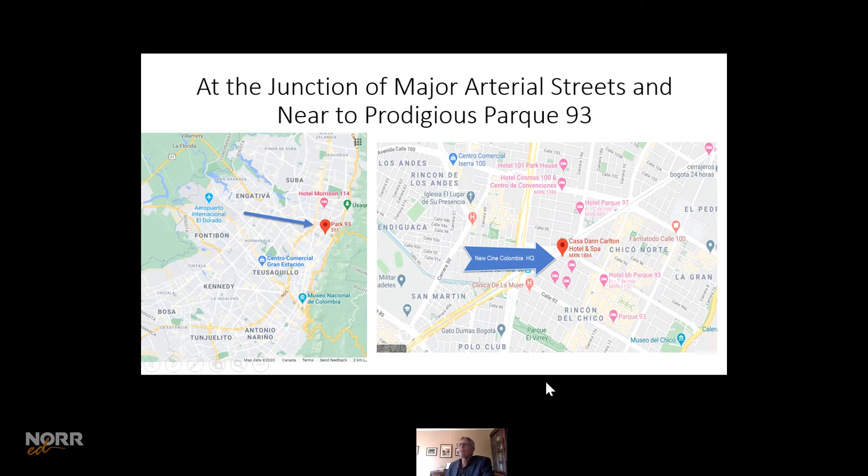The inspiration for some of the architectural rendering and the process here is from a project by OMA in the Netherlands - the building Fondazione Prada in Milan. This was the building we first sought out as the best example of white architectural concrete that had been done around the world. Lloyd's team went there and documented the building, some of the successes and areas for potential improvement.

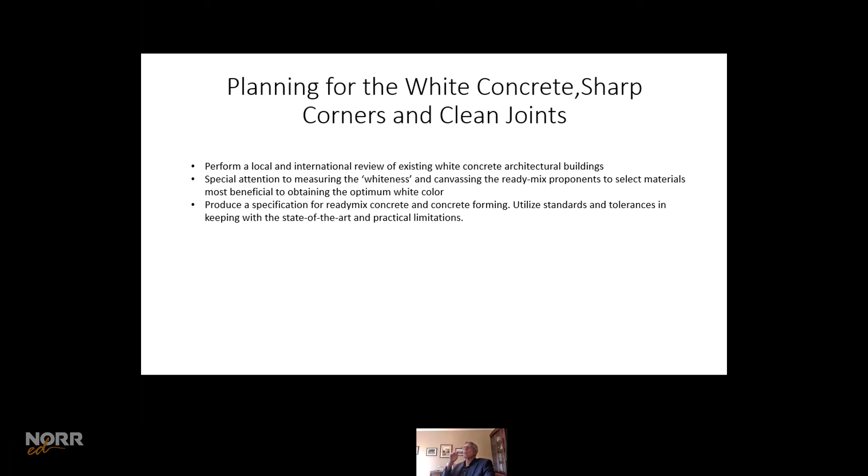So in order to achieve what we wanted here, we performed a local and international review of existing white concrete architectural buildings, with special attention to measuring the whiteness and canvassing ready-mix proponents to select materials most beneficial to obtaining the optimal white color. We were to produce a specification for ready-mix concrete and concrete forming, and utilize standards and tolerances in keeping with the state-of-the-art and practical limitations.

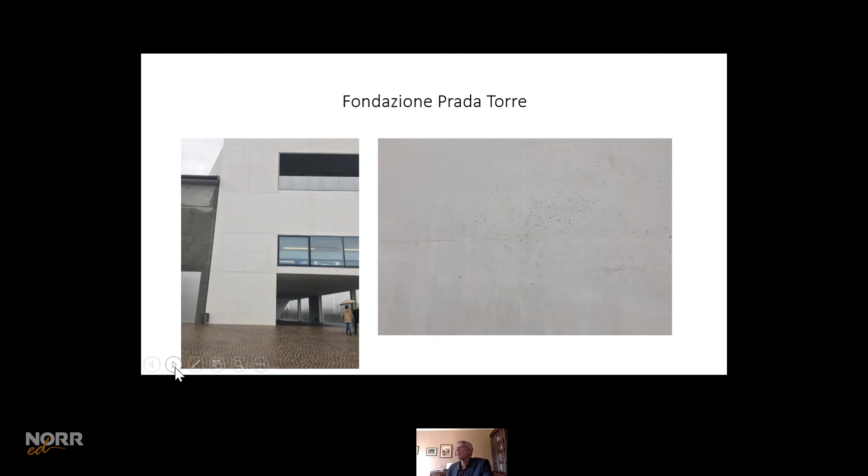Even though it was a very well-renowned building, there are always things you look at and think, well, I'd like to improve this, or we could do better. For example, the coloration of the tie holes in the photo on the left, where the color wasn't matched properly, or the joinery between panels. These are things we wanted to try to improve upon.

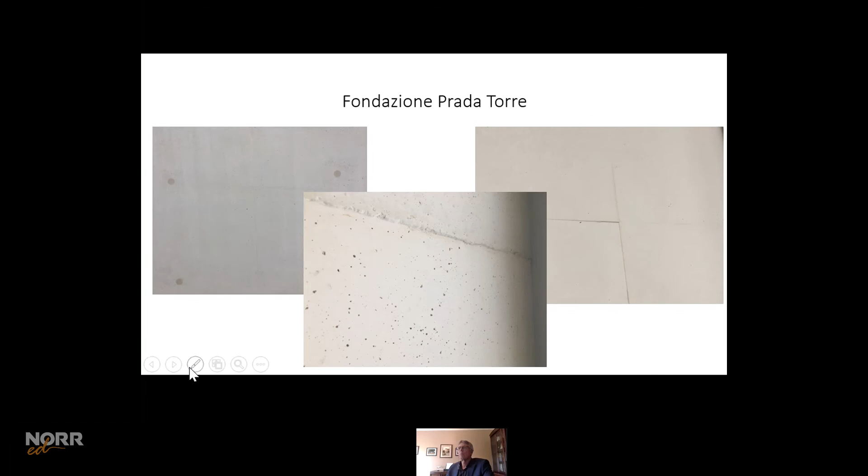On the ceilings, as with anything when you're forming or building these, the tradespeople have to get onto it because they have to set the rebar, set the forms, and put the release agents, so they have to tie the panels together. With that, there are opportunities to impress discolorations, stains, or contaminants onto the surface of the formwork. You can see some of these in these pictures, and these are things we were looking to try to protect against.

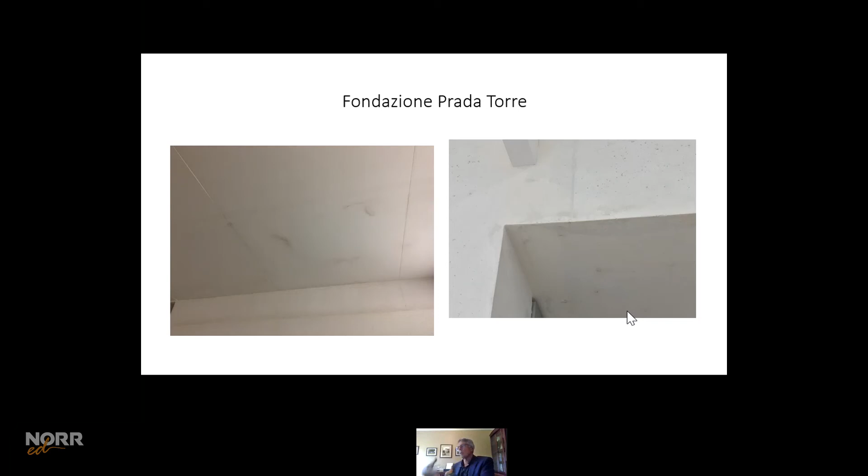The photo on the right shows where some of the sharp corner edges had broken off, so they'd have to patch it to try to make it look okay. We looked very carefully at how we're going to protect these edges and the way we're going to pull the forms off, so we don't impart a torquing that damages the edges. That was something we learned from looking at the project.

We walked through there and looked to get the impression, and the impression of the white concrete really stood out in the area and made it look really amazing. We met with the local architect, who was responsible for building this in the various stages they built in, and we picked out some really good ideas, and also some that we thought we could improve on.

One thing was that the whiteness was not as profound as we were looking for, and we went through ideas on how we could improve that to make it stand out. It's important to mention that in Bogota, a lot of the architecture is brick or beige in color, so you get this predominant beige color throughout the whole city. One of the things the owner and the architect wanted was this profound white, stark building to stand out from the rest of the cityscape. So it was very predominant, and we learned from it.

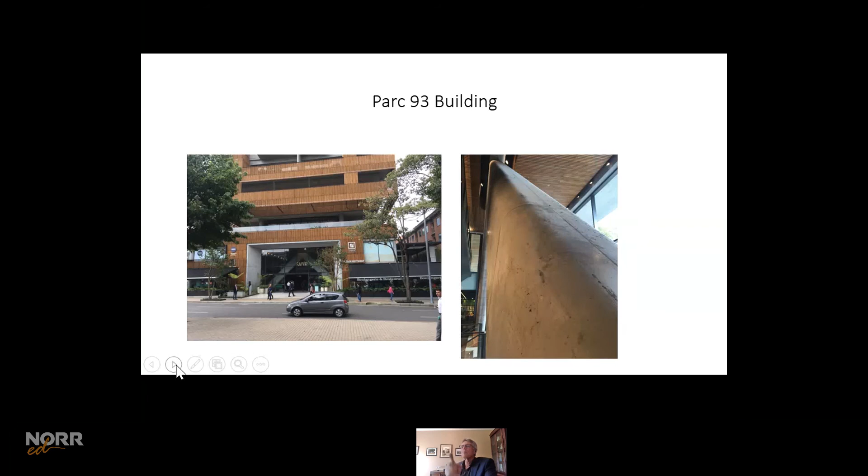One of the things we looked at though was the potential to reduce the bug holes at the top surface of the form of these columns, which tend to predominate. They used an SCC there, but there is a tendency, especially at the top of a slanted column, for the air pockets to congregate, and you do need to have a mechanism to deal with this. So because of that, we looked into external form vibrators to try to reduce the presence of these bug holes.

But again, as you can see from the building, it gave a lot of nice impressions of what you could do with concrete and how it can work in an architectural design.

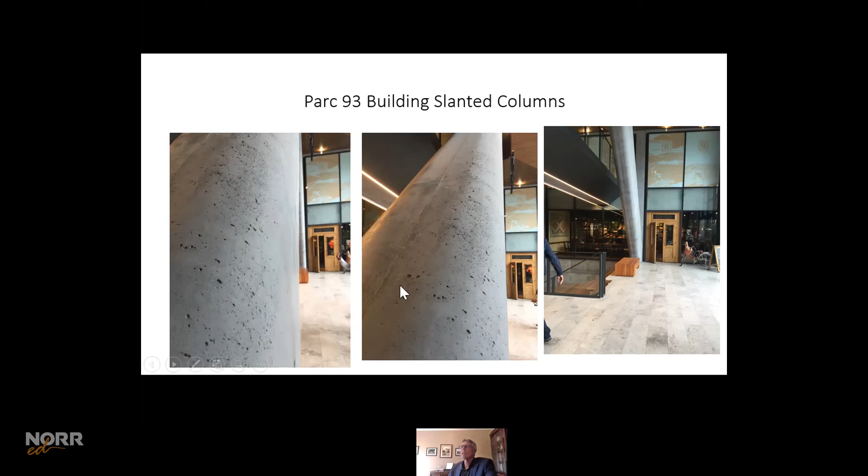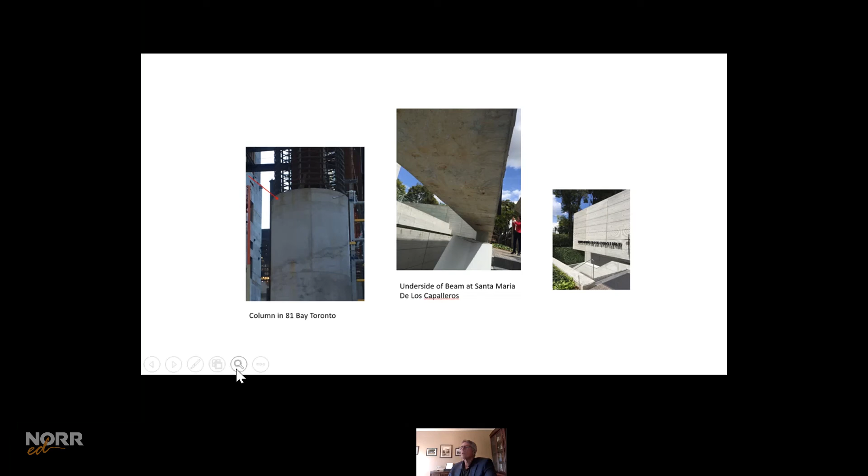Similarly here, you can see on the underside at the Santa Maria de los Caballeros building, some of the soffits. Again, there was staining on the underside of the soffit from the runoff and the oxides building off of the rebar while they were getting ready to form. So we learned that was a thing we had to deal with.

Next thing is on the ready mix prequalification. We're going to talk about that a little bit. We knew this was a very special project, and we also knew we were prequalifying a number of ready-mix producers to be able to supply the concrete in Bogota for the building. We asked that there be a number of technical considerations that we went about.

One of the things I built into one of the meetings was requirements for the hardened properties: there was a strength requirement, and a permeability requirement, so in fact we don't absorb a number of contaminants. There was a shrinkage requirement, and a requirement for modulus of elasticity, so the movements are constrained.

A lot of the aggregates in Colombia, in Bogota, tend to be slightly to moderately reactive to ASR. So I had to ensure that we did testing to prove that, with the blend and mix we were going to use, it would not create a reactive mechanism that would lead to deterioration down the road with time. So we made sure we did testing for that.

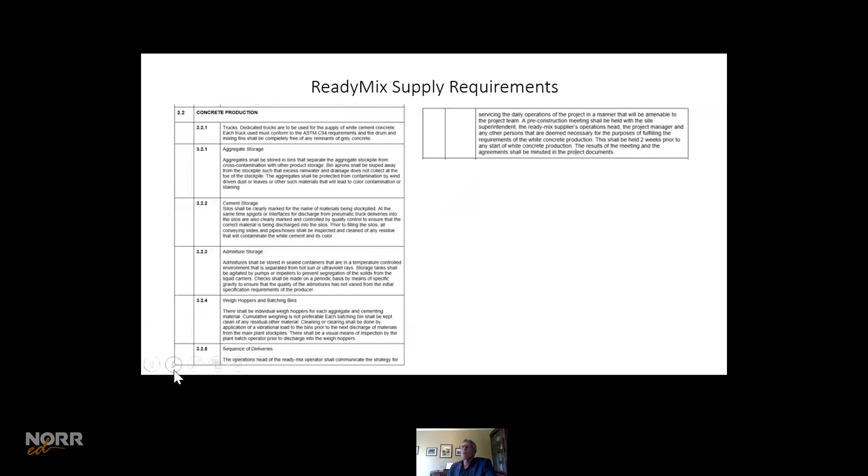So there were a number of issues we had to deal with that we discussed with the ready mix proponents in our reviews.

Our 4 proponents were chosen with help from our construction manager, who was local to Colombia, and the architect. We came down to 4 proponents we chose to pre-qualify for the concrete: Holcim, Ultracem, local from northern Colombia, Argos, and Cemex.

We had special specifications for the white cement, for which we identified an equivalent manufacturer with appropriate properties. That was Lehigh. We also limited the amount of coloring oxides in the white cement. You can see in the second item here where a number of the oxides that would create color were limited, so we did ensure that our white cement was the one we were looking for.

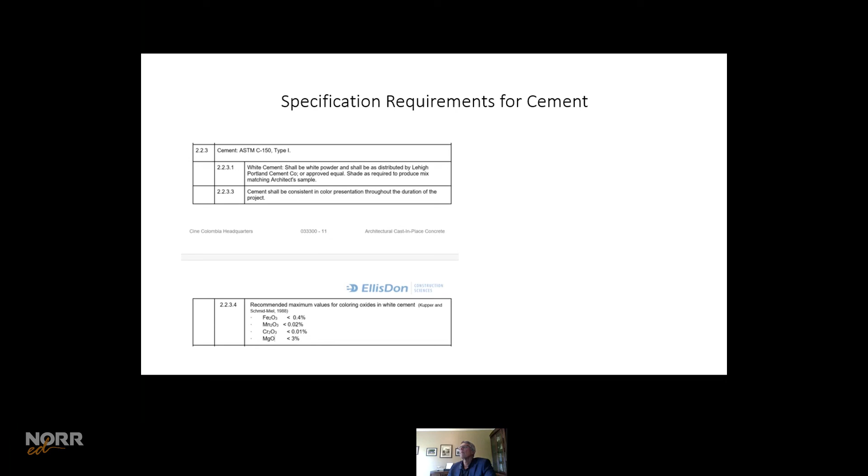When we were meeting with all our proponents, the various ready-mix producers, one problem we found was that it was pretty hard to communicate that we really wanted something iconic, something that showed distinction from the rest of what was resident in the region in Bogota. A lot of times in the initial communications, it was always, well, that'll be expensive, so we can do this and it'll be cheaper, and that's what the owner will want. But the owner was very explicit. Every time he talked to me, he said, Lloyd, this has to be the best, and you've got to do this for me.

So I figured we had a communication problem, where the ready-mix producers always thought price was the predominant factor. So I said, you're going to do something for me. We have two mixes I want you to provide. We were going to be doing mock-up 1, which we'll talk about. I want one mix that is going to be the best you can do—you hold out all stops and don't think about the price.

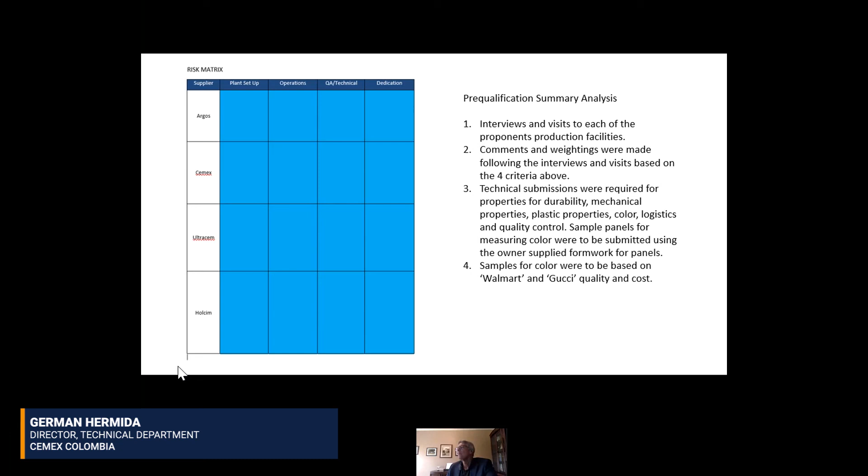Yeah, from the point of view of the concrete supplier, we understood the message from Lloyd. We had to change our definition of white concrete, because for us, white concrete had a specific image in our mind. For example, one I showed Lloyd was a quantity of sand from our plant, and I told him, this is our white sand. He walked to the sand, put his finger on it, and pointed out exactly the gray and black parts—very few, but he told us this is not white. So we had to change our mind to understand what exactly our client wanted.

So we began to think in that way and look for different raw materials. We had to look for a special cement, the whitest cement, searching around the region. We also had to look for different kinds of aggregates, visiting many quarries around Bogota, and finally we identified one source which is really, really white. This aggregate had not been used before for concrete, so we had to explain to our supplier how to make sand at a bigger scale.

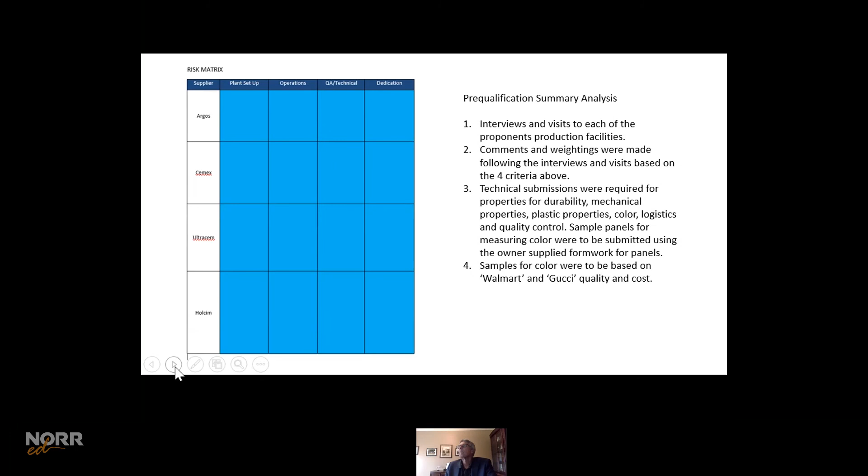So finally, we had to develop chemical admixtures and eliminate the pigment that we use to identify this substance. All the effort was made to obtain a level of whiteness, the whitest we could, for the client. So using this kind of movement, we developed a special concrete, a new special material that had not been used before, had not been obtained before.

So this is another way of doing things where the price is not the variable to follow. It's not the price. Of course, the price is important, but it's not the main parameter which governs all the decisions. So this was a very nice exercise, and I think finally we understood what our client wanted.

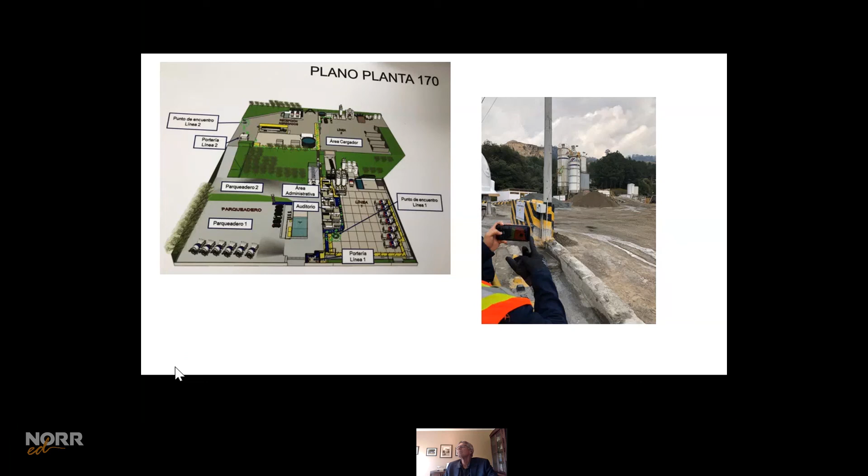That's it, Lloyd. Thanks, German. Okay.

So anyways, what you have here is some of the areas, and you can see the sand is actually very white that we eventually ended up going with. Because of the whiteness of it, we had to make sure that it was covered and protected from wind-blown contaminants being driven onto the stockpiles, even while they were stored at the ready-mix plant, because if that mixes in with the sand, that's going to affect the color. So all of that was very carefully done.

We checked through this when we were doing a mock-up the next day, and we made sure that everything was clean and uncontaminated. They shut down the plant for like 6 hours the day before and went through a whole cleaning mechanism to ensure that everything, right from the conveyors to the batchers to the front end loaders, was clean and devoid of any of the contaminants from the gray concrete.

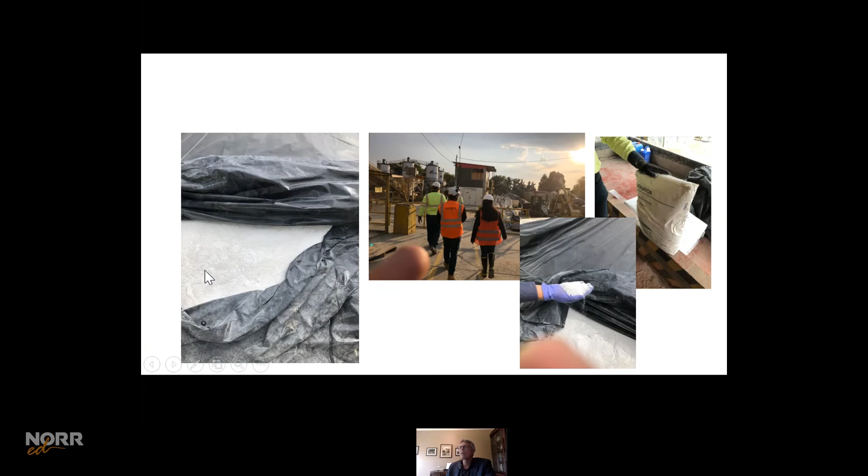Okay, so besides just the ready mix producer, we also had to ensure that we brought the formwork suppliers on board too, because there were a lot of special items that had to be dealt with the formwork supplier. We wanted to ensure that those joints I mentioned earlier were not apparent, that everything was clean, that the lines were true and straight, and we didn't get movements or deflections in the installations. And because we had the slanted sloped columns, that created the need for a specialized design for the formwork systems.

So we met with three or four formwork proponents, and we met with them to explain what we were trying to achieve with the 90-degree corners, with the exposed ceilings, with the lack of joints between the panels, and with the customizing for the slanted columns.

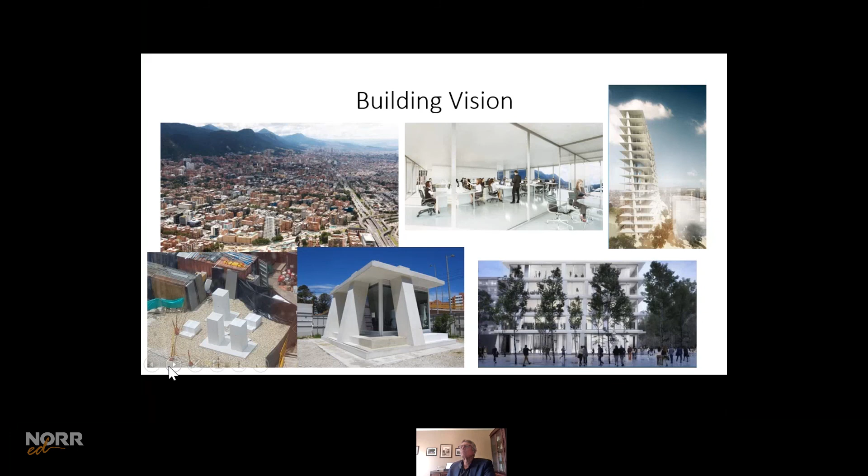Ryan's going to speak briefly here, he's got a couple of slides he's going to talk about the structural design philosophy. Sure. Just to zoom into a little bit here, so everyone can understand, I think all of the various conditions we faced, we had to address for the formwork. A lot of them very unique. Kind of zooming out for a second.

One of the interesting aspects of this project is that when we started in concept and schematic design, we initially worked with a team of international engineers who we work with on all of our projects, including a mechanical engineer based in New York, and a structural engineer, SOM, who was working between their offices in Chicago and London. And so one of the interesting aspects of this, which we'll see on the next slide, is that Bogota has a very high seismic activity area. It's a seismic design, and how you resist that movement is a very high concern.

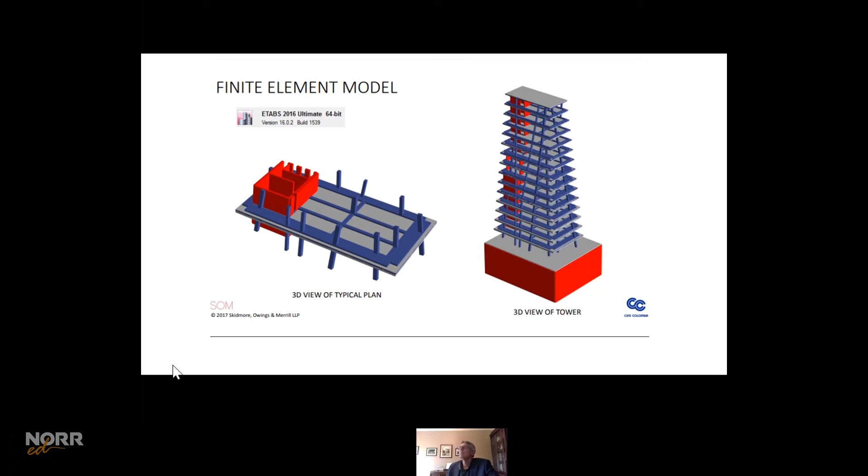Lloyd, if you can go back to the previous slide, just to point out a few other things. With the floor slabs, we have these enlarged perimeter beams, which were also a challenge. Lloyd will talk later about the challenges with catching the water there to prevent it from dripping over the edge with the pollutants. The columns were obviously a challenge for pouring. Then we have the building core in red on the left-hand side here, which is an architectural concrete surface, and that provided the lateral stability in the building.

One of the other things too, Ryan, is that we didn't want to drain the water down onto the vertical surfaces, especially from the perimeter eyebrow beam. So when rainwater would land on there, we wanted to make sure it drained in and down through a drainage path through the building. The way the building was designed with the core, the only place we could bring it down was in the core, so we'd have to run the water through a drainage channel all the way around the perimeter to one or two points in the core.

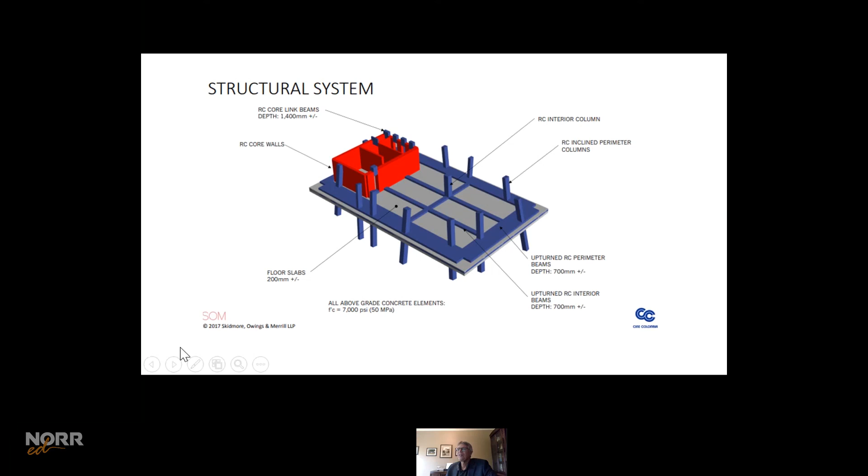This created issues with the size of the drain and the slopes and whatever else, which we talked about in our meetings for a year and a half at least before we finally came up with a solution. It was one of the more challenging items in the whole building.

Just some images here about that seismic motion.

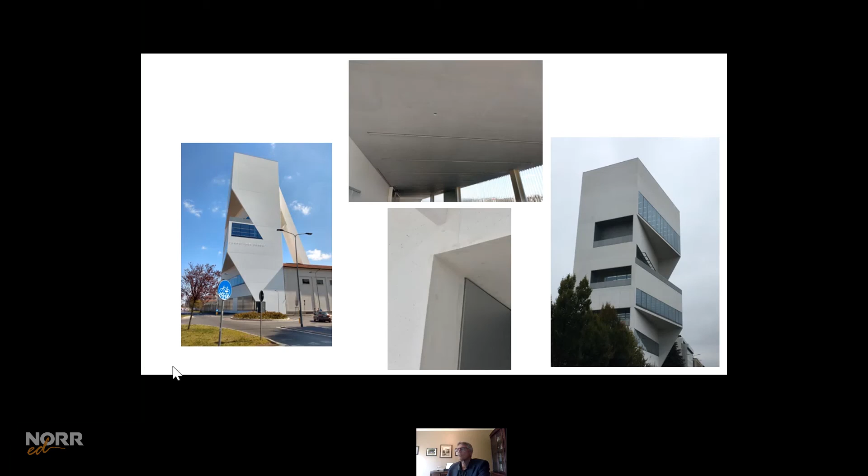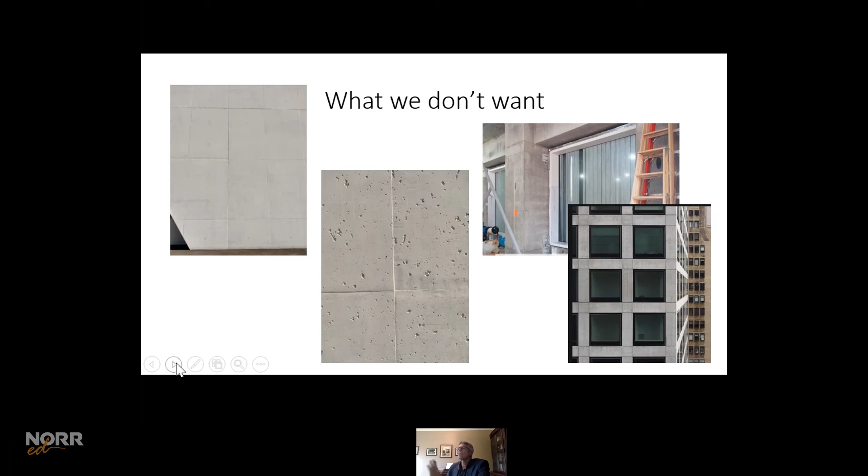Then, these are things we were talking about with the formwork producers, and we again showed pictures of the Torre building in Milan - some things we wanted and some we didn't, like the discolorations and the panelization of individual sections of the wall because of the misalignment of the forms. Obviously, the surface imperfections and discoloration due to different timing on removal of forms - these were all things we discussed, and we talked to them about what we didn't want.

To deal with the misalignment of the face sheets, we went with a double layer of plywood, where there was a base sheet and then the face sheet on top, and they would be staggered so that the joint between the face sheets would be fully supported by a layer underneath. So that was one of the things we looked at.

We also looked at vertical elements - the core and the columns - extending 20 millimeters above the bottom faces of the slab soffits, so that we could have a nice crisp line between the horizontal and vertical element, rather than stopping the column or core below and seeing a ragtag line. That was an important thing there.

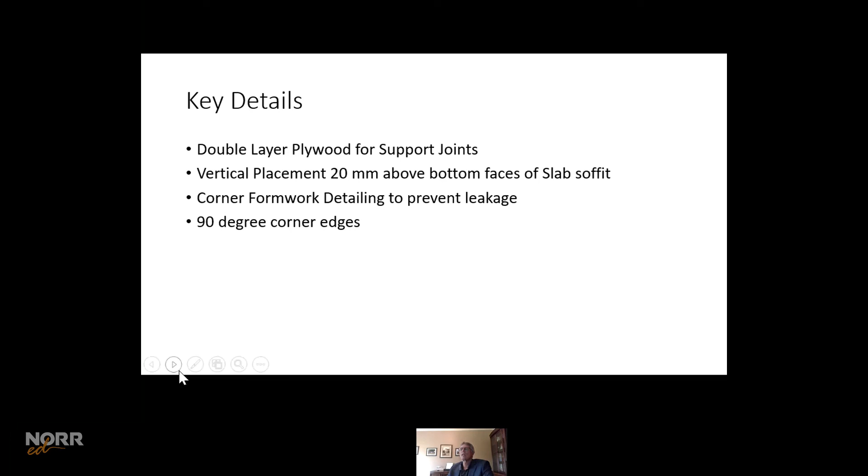Obviously, we talked about the corner formwork detailing, how we wanted sharp, clean lines and 90-degree edges, and how we wanted to ensure that the joints, when they came together, were tight and didn't allow any leakage of paste through the forms at the joints.

The next phase we went through was the specification for the Phase One Mockup, which was essentially a series of panels for the ready mix producer to provide - 24-inch by 24-inch by 2 inches thick, cast with the types of concrete they were going to supply to us, both the Gucci and the Walmart. We had an order of somewhere around 28 panels submitted by all the proponents, with different variations sometimes of the Gucci versus the Walmart.

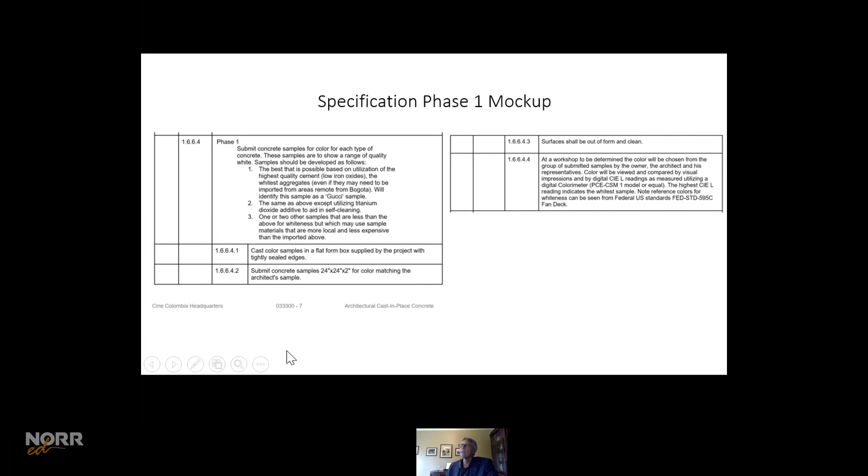And we would use the colorimeter to measure the performance.

They would supply the equipment for forming and falsework support. They would lay out and supply the facing materials and backup plywood on their shop drawings, and they would inspect and verify the installation. We were putting a lot of the impetus on them to ensure we got the product we wanted, because the labor force doing the installing didn't have that expertise, so we wanted to make sure the onus was clearly on the people engineering the stuff.

So for the review for the formwork people, we needed them to prepare a set of engineering drawings showing concept for slabs and beams, columns and column-to-slab joints, and core walls.

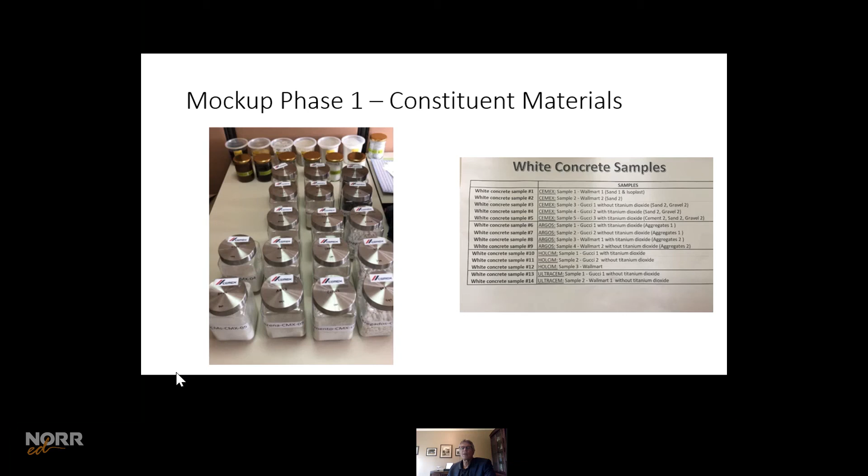Here were their constituent materials, which we found very useful to have, because we could see first, from a perspective, how they came upon the whiteness of the color, and secondly it was a control down the road. In the event something changed, we had a retained sample to verify if something was going to change or be adjusted, because we wanted a uniform-looking building.

In mock-up phase one, all the panels were produced and set out on a black background, and the project team reviewed and walked around to select what looked best.

Munir, who is the owner, and Thomas, the architect, were here. Between them, they chose the panels - two groups of panels were chosen to be the best going.

We measured both by visually looking at it, and we also had a colorimeter, which measures, as I mentioned earlier, on a scale from 0 to 100, the degree of reflection. There's a light that shines on the underside of this device down onto the sample, and it measures on the scale the amount of reflectivity. The value here, the whiteness, is the L value, and for the one I measured there, it was 83. For a number of our samples, you can see the various levels.

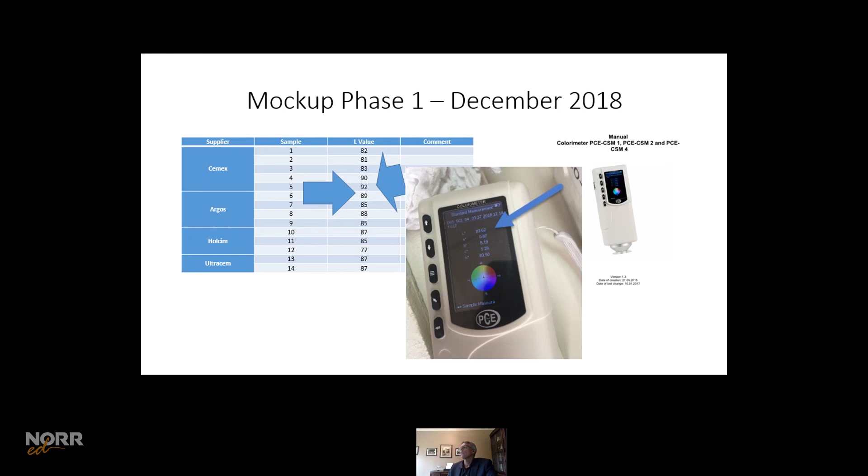We had anywhere from 77 up to 92 as the top value. Ultimately, we chose two proponents, Argos and Cemex, to move to phase 2. We wanted to still have more than just one, but we also mentioned to Argos that they were going to have to improve their numbers.

Again, these were the samples. Typically, what we did is we wrote in red the number from the colorimeter, and then we would visually review on top what we thought the best was. Invariably, quite frankly, the highest number was the one picked as the best sample, so it calibrated very closely.

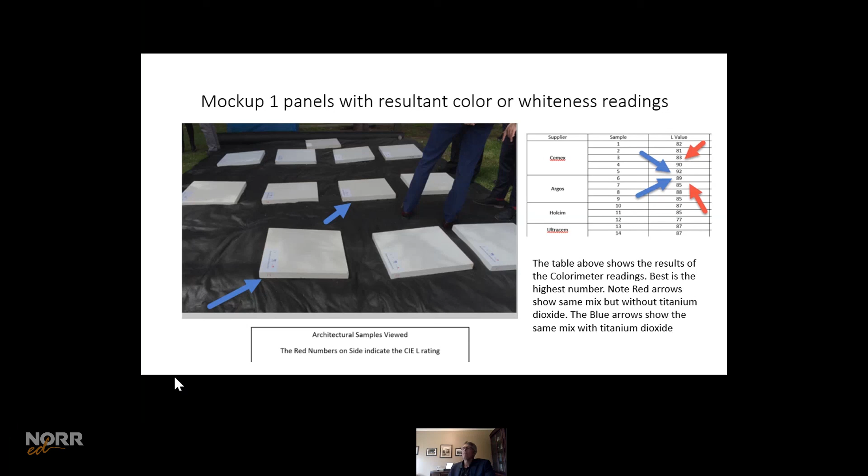One thing I wanted to point out between the blue numbers - you see for the Cemex samples and the Argos samples, there's a red arrow and a blue arrow. The only difference between those two samples is the one with the blue arrow had titanium dioxide included, and the red arrow did not. You can see there's an effect of anywhere from 5 to 8 increase in the number based on the fact that you've got this titanium dioxide.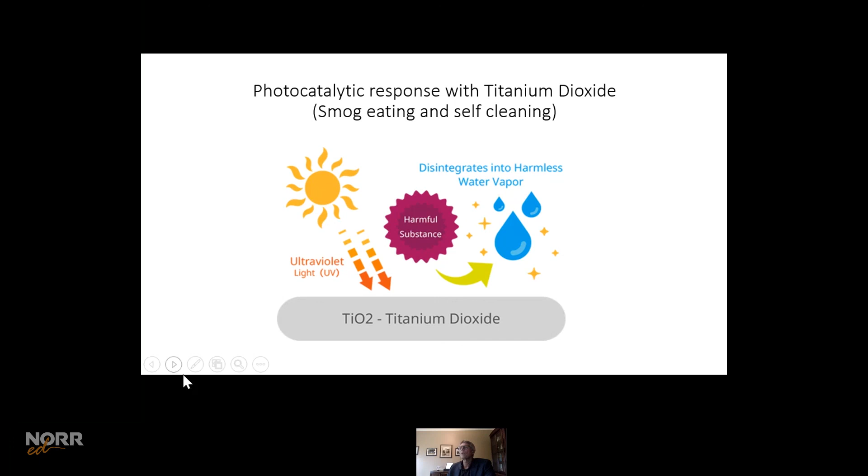Just a little bit of background for those who may not know, titanium dioxide is actually photocatalytic, and it reacts with ultraviolet light from sun and water and with a contaminant to remolecularize to the point where the contaminant dissolves and is blended into and goes away as water vapor. So they call this smog eating, or self-cleaning is another term. So it's a beneficial attribute also. Besides having the color, it actually is something that's friendly to the environment, and it enhances, reduces the pollutions in the air to a degree, which is very beneficial due to this photocatalytic response.

Based on the results of Mockup 1 and the selected color samples, we chose 2 proponents who would then move on to Mockup number 2, or phase number 2. Phase number 2 was to produce large samples, columns, to identify the type of formwork surface that we would use for the facing materials. So what was chosen is there were 4 formwork materials we chose.

There were 3 that were phenolic HDO plywoods. One was Savona from British Columbia. Another was Super T from Colombia, and a third was another Colombian phenolic, and the fourth was stainless steel.

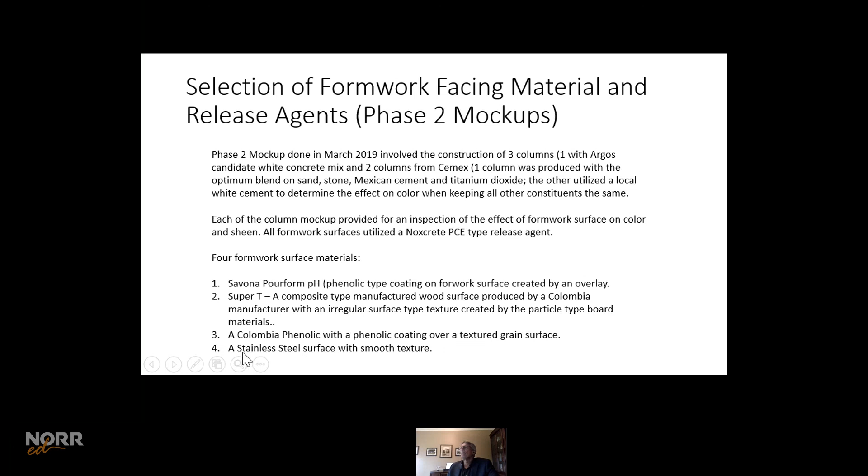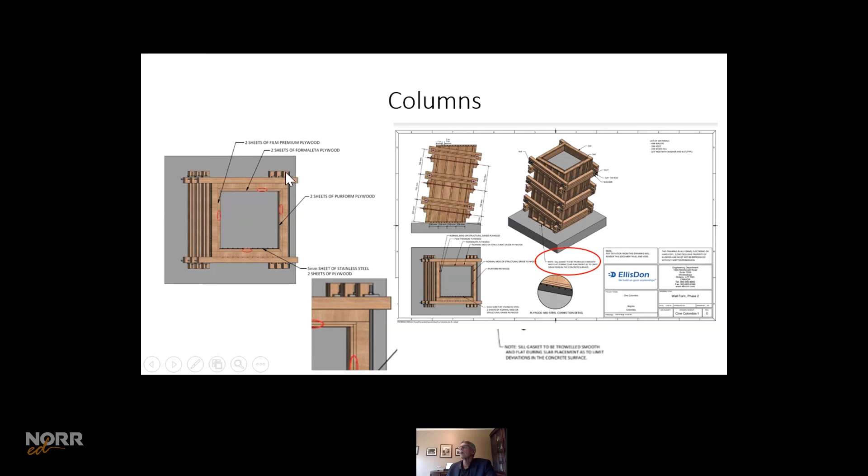The makeup of the columns we made - that was a drawing we drew up, but we eventually ended up with it straight or vertical. Essentially what we had is surfaces where each of the 4 sides of each column would have one of the potential formwork surface materials, whether it be one of the 3 phenolic plywoods or the stainless steel. Some of the detailing we did was to make sure all the joints were pinwheeled, so the joints would be as tight as possible and there would not be a breach or a lap. We made sure the joints were pulled together tight by our forming and our ties.

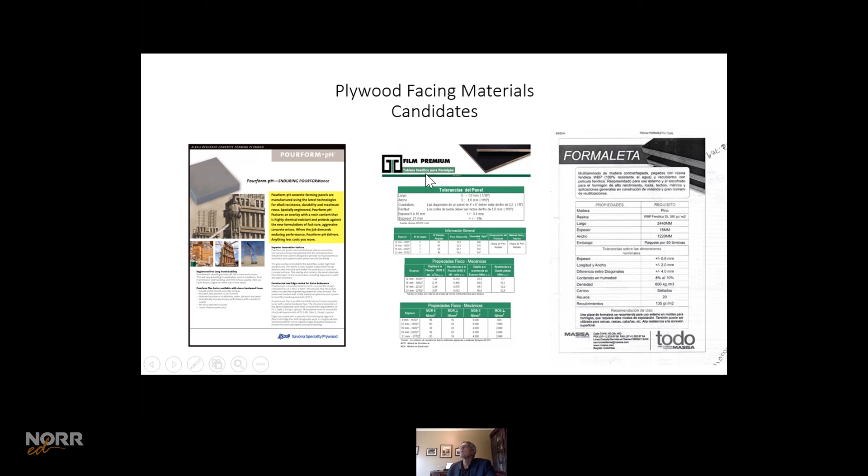These were the 4 facing materials that were used, as I indicated earlier: the one from Pourform pH from Savona Plywood, Tablero Premium, and the Formaleta product. We used Noxcrete PCE as a release agent, which from our experience has been one of the best we've been able to use for architectural purposes. It's a very thin film applied, very high rate of coverage, so it's a reactive type release agent that's very thinly applied, and gives you a very beautiful architectural surface.

This is the stainless steel, one of the phenolics, and a third of the phenolics, a second of the phenolics that were chosen. And then here was the Savona plywood.

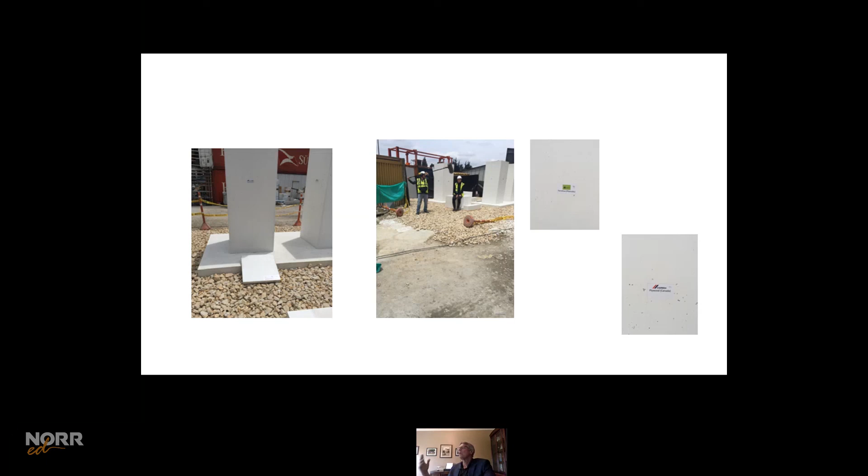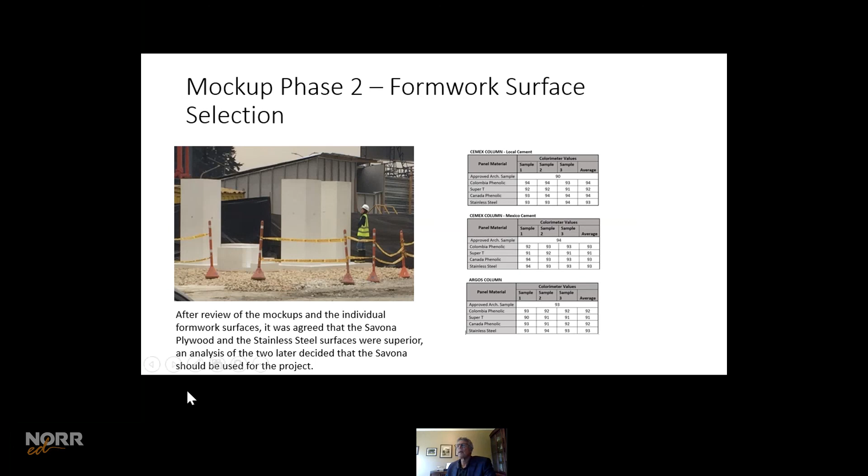These are the samples we produced - 3 columns, again with each having the 4 formwork surfaces, and we had 2 mixes from Cemex and 1 from Argos. From that we measured the results, and came up with - we measured with the colorimeter, and as you can see, most of the numbers were fairly similar. The main effect we found was with the surface finish and the smoothness of the various formwork types. We found that both the stainless steel and the Savona plywood were by far the most beneficial of the formwork surfaces we used.

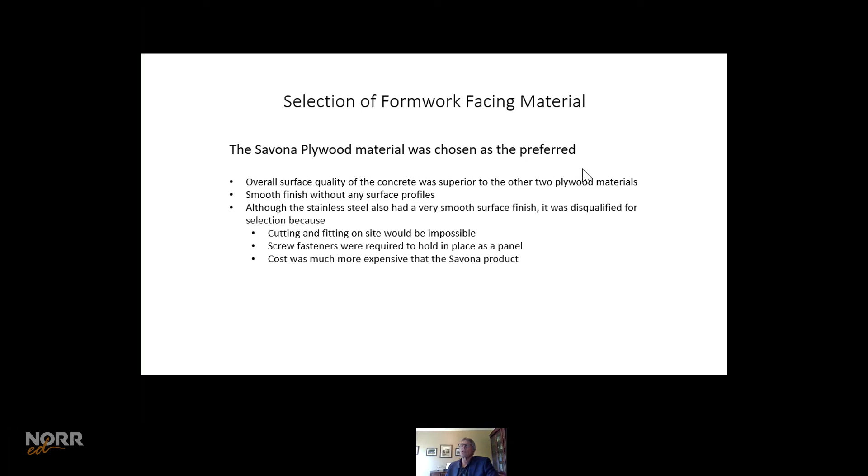So ultimately, we chose the Savona plywood. Overall finish quality was superior to the other 2 plywoods. The stainless steel had a very smooth surface, but it was disqualified because cutting and fitting on site would be impossible. Screw fasteners were required to hold it in place, and the cost was much more expensive than the Savona plywood. So we chose to go with the Savona.

Basically, after we had done all the testing for the information - the hardened properties of the concrete and the plastic properties, and the review of the color and everything - Cemex was chosen as the proponent that we move forward with for the project.

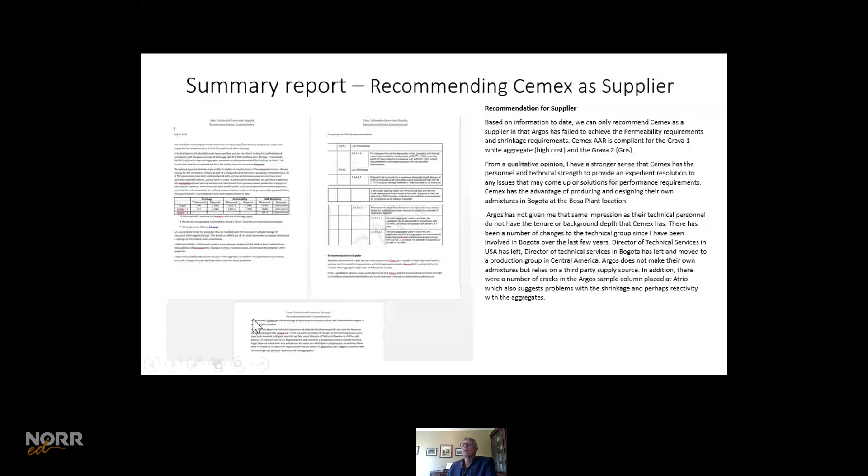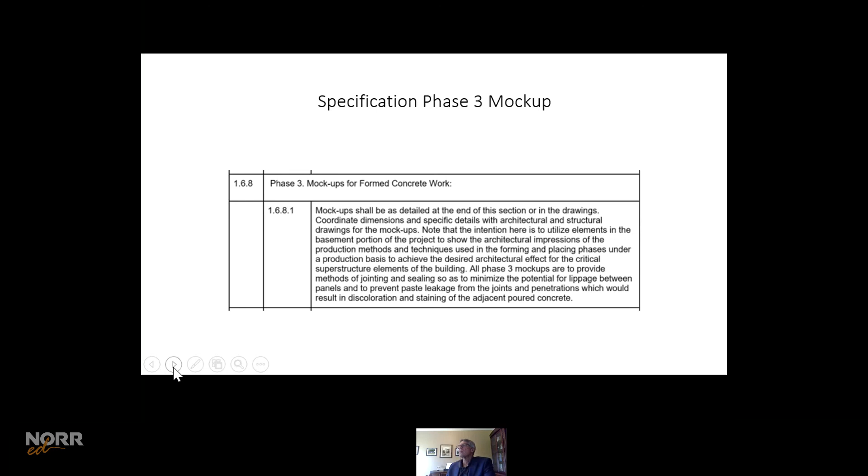Next phase was phase 3. That's where we do a full-scale mock-up with a full set of drawings and a mock-up that would show the various elements in the building, both the horizontal surfaces - the slab, the perimeter edge beam, the slanted and vertical columns, the core walls. All that would be built into our mock-up, so that we could learn and see the benefits of the strategies we were going through.

This was a schematic, or a 3D drawing, of the mock-up, and as you can see, we have the one elevated slab with the perimeter beams, slanted columns, concrete core walls, 90-degree corners in all the elements.

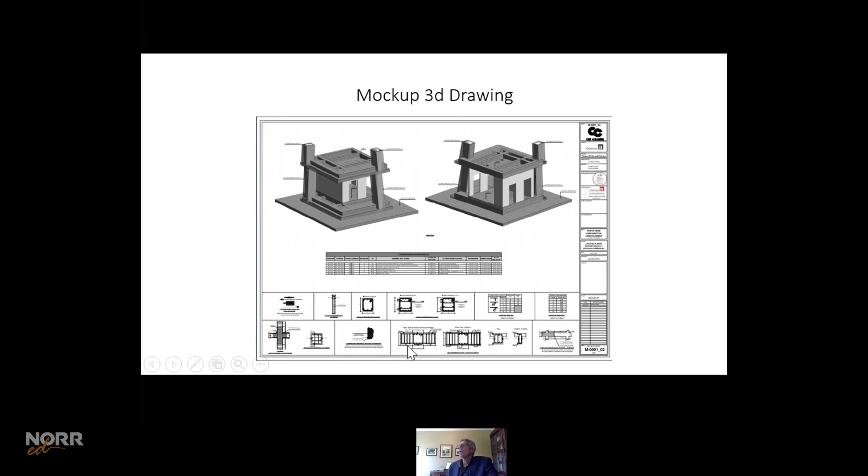These were a concept of the shop drawings for the slanted columns by who we had chosen - Sten, as the supplier for the formwork, because they proved to be the most beneficial, the best proponent of the others that we chose to review. So they had a slanted - they had an idea that they were going to go with fillers into a normal straight column and build that to create the slanted columns.

This was proven out in our mock-up to be really an impractical method to build. It was very, very heavy. It was hard to put in place and to align because of the large surfaces that you would have to be able to set on top of the previously cast slab, and any miss level or out of alignment would reflect and basically replicate a movement in the filler.

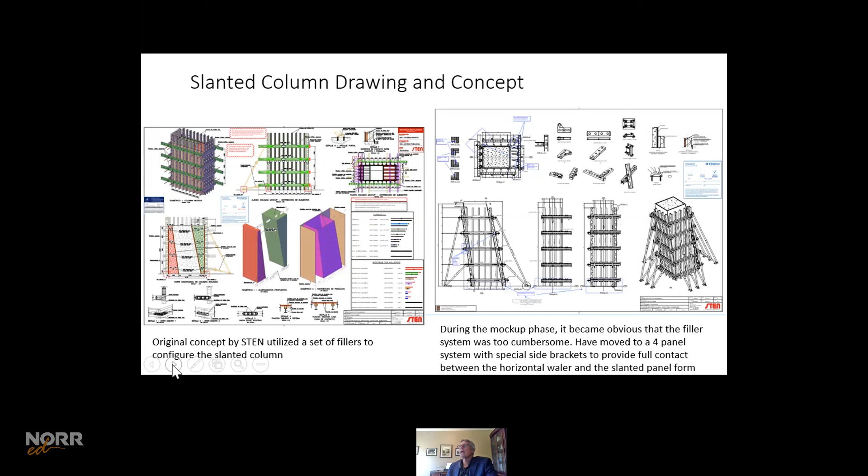So that was it - it took the mock-up to prove to the supplier that wasn't the way to go. So we ended up with something that's a lot more feasible and gives you a lot more latitude, easier to place, easier to lift. We ran out of crane capacity with these large columns if we were going to go to the extreme end of the building, and so that would have been a challenge to move these.

To create architectural impression with the thin 1.5 millimeter joints, as I mentioned, we needed a double layer of plywood. So essentially the base layer would be, as you see down in the bottom right of this drawing. These were placed first, and then the second layer, or the face sheets, were placed secondly, as you can see here. So we placed the primary layer, and then the top layer of the face sheets were placed afterwards.

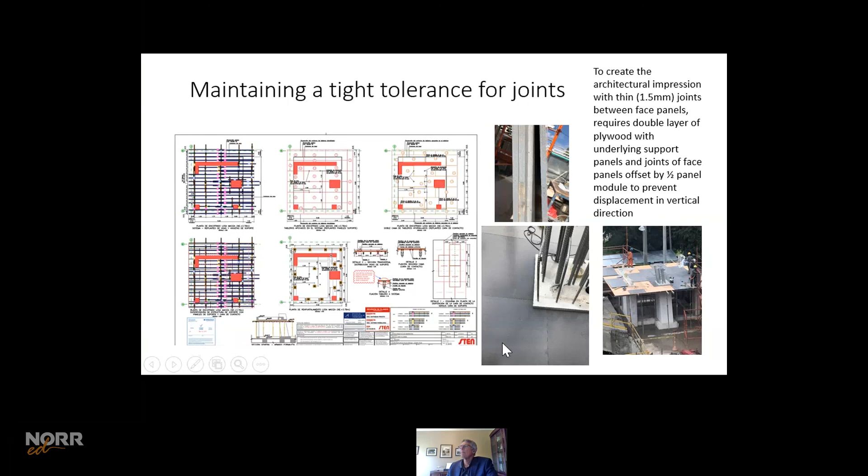We also had an issue which I talked about way back when, is the staining created by the black steel, the oxides being run off by the rain. We were able to convince the owner and the architect that we should really move to galvanized steel, which would then negate the potential for having any oxidation of the reinforcing steel, and it meant for a lot cleaner thing.

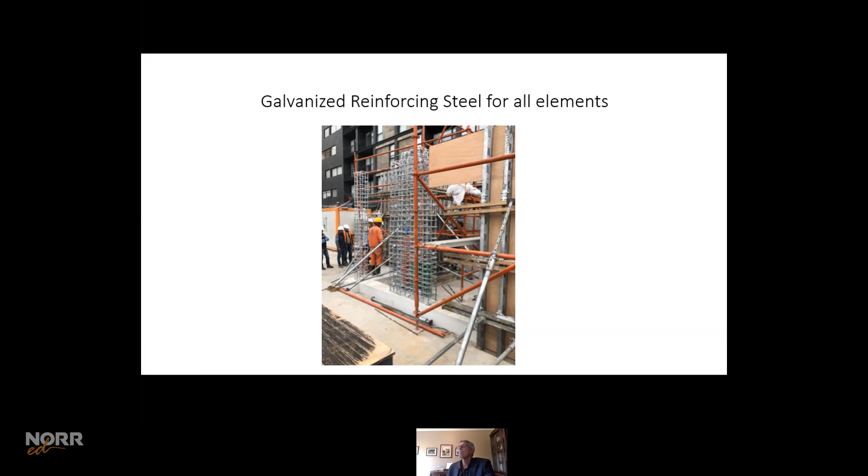But because of our white iconic structure, we had to go with that way. So all of the reinforcing steel was galvanized steel. And again, a lot of the reason was there was lots of rain in Bogota. The steel would get oxide, and then it'd run onto the vertical surfaces.

Here we're preparing our formwork panels. We had a sort of a temporary shop that was run. We had two subcontractors working for the installation of the formwork. One was a carpenter who was specializing in creating the joinery and the geometry of the face panels. The other was responsible for the less sophisticated work of clamping the forms together and setting the false work, shoring, and stuff in place.

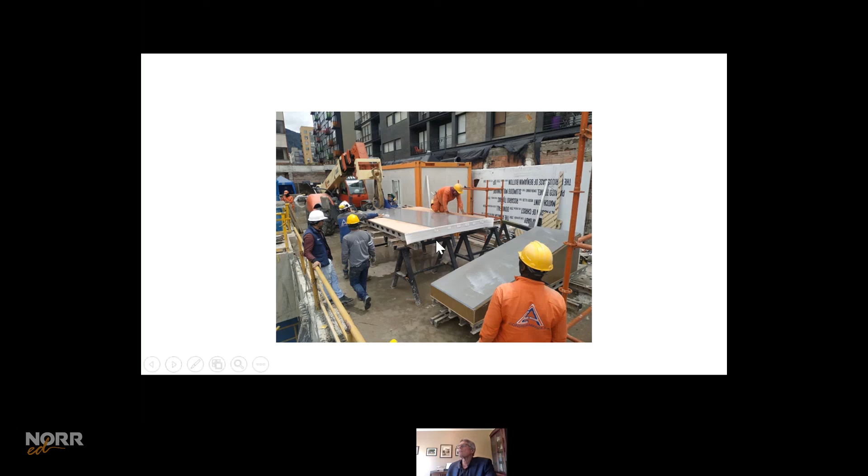What we found, though, was that in a lot of cases there were issues that we had with the joints and the edges, where the joints just weren't as tight as we wanted them. And then we realized as we went into this that the surface imperfections of the manufactured plywood were such that we were getting a gap of anywhere from a 1/16 to an 1/8 of an inch, just due to the fact that the plywood edges were not properly treated and sealed to prevent swelling due to the moisture.

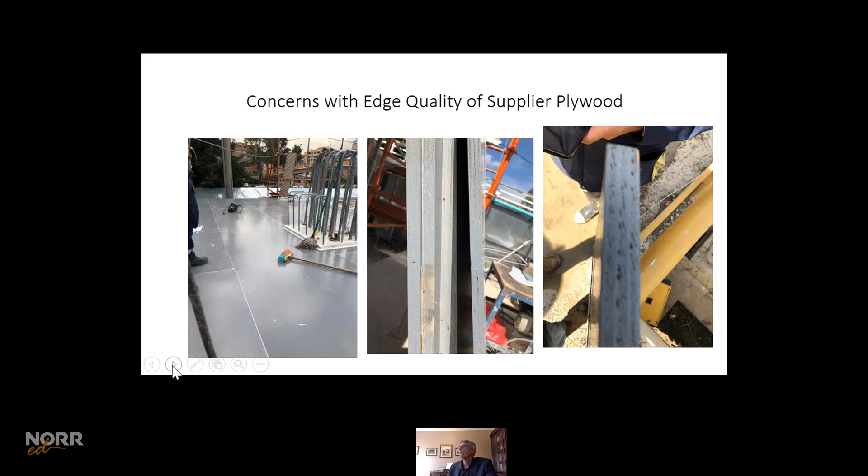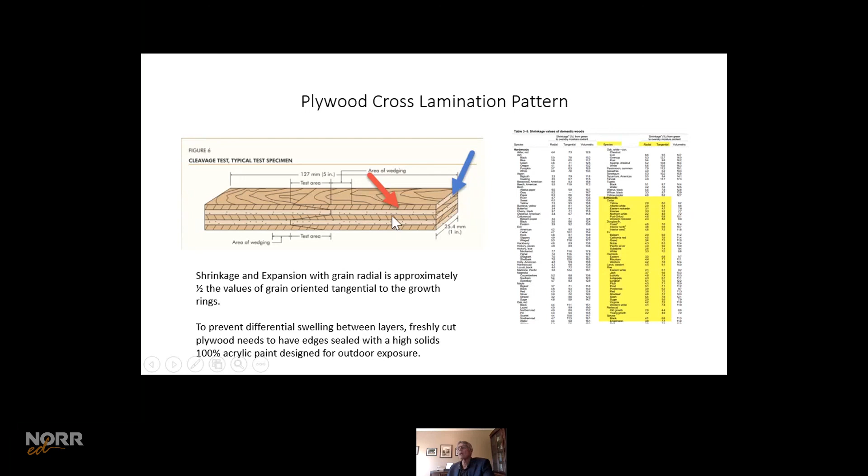So what we did is for the later work we talked to the manufacturer at Savannah on what they could do, which I'll show you in some slides. But for what we were doing now, we had the freshly cut layers. We had to make sure that we used a high solids acrylic paint designed for outdoor exposure that we painted onto the outside edges as they were cut.

The other thing is the method that they use for cutting the plywood, cross-cutting or ripping the sheets to size, was not ideal - they used a handheld quick cut saw, and because of the inability, even though they ran it along a straight edge, their hand was not able to keep it in a true plane. And so we got both a waviness and a twisting.

So for the production, we have to go with a panel saw, which has guides for connecting the saw blade, to which you can slice the plywood in this direction or twist the saw and push the plywood through to create a ripping action. But now you're controlling that movement, and you don't get that variation done by the handheld. So this is a necessity to achieve these straight joints.

This is just a sample showing what's happening and how the gaps between the joints were, and there's the backup plywood and how the edges weren't sealed, and then of course you get this movement.

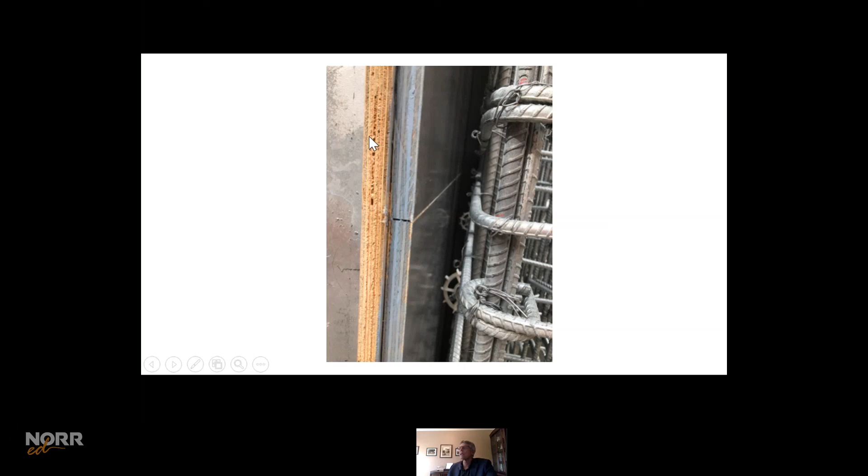This is a photo showing the slanted column and the size of the element, and how hard it was to try to get it to set flat on a surface. If we tried to plumb it and set an elevation, if you had to twist or move this in any way, part of the support would lift up, and you would get a gap in the joints.

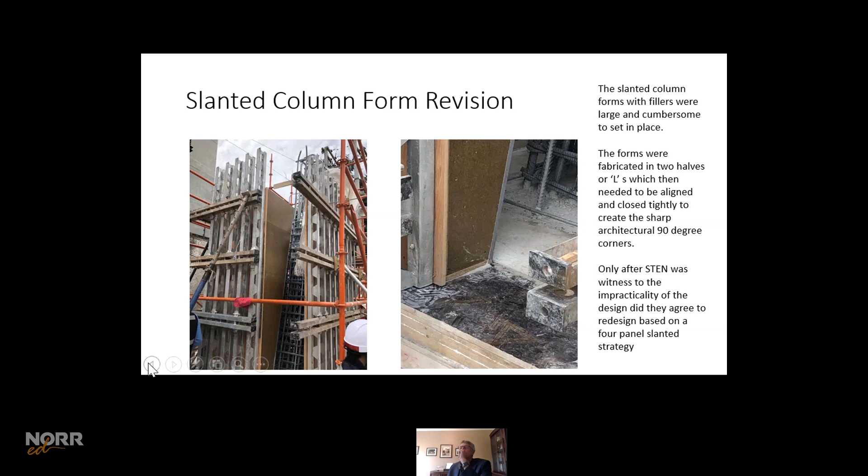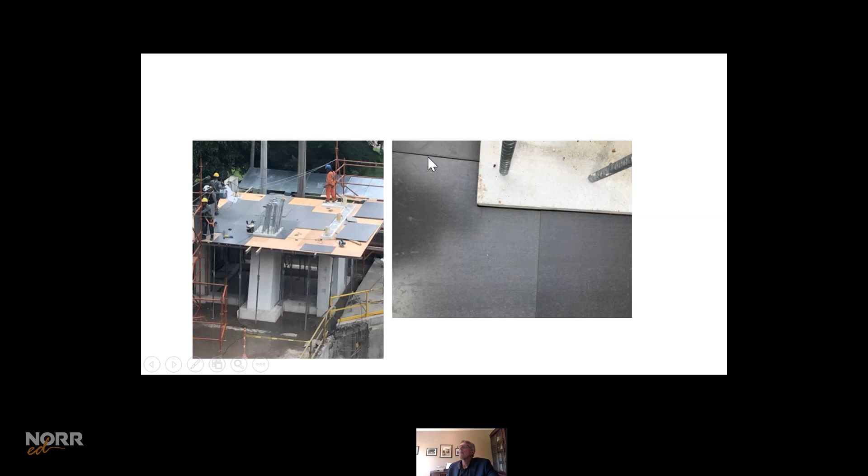So this was, as I showed earlier, a modified slanted column that we went with that will be a lot easier to fit. This is the installation of the plywood at the top surface, and one of the things that was apparent is that they were cutting the plywood up there on top as they were trying to fit it around the joinery, and the joints weren't as good as we wanted, and the gaps here, again, panels was not appropriate. We also used a sealant to put between the joints.

Now here you can see this is a picture taken about an hour before, and this was them cutting panels close to where the installed work was. Cutting panels, and the wind would blow the sawdust down into these joints, and then we had a rainstorm, and guess what happened? The sawdust was running down onto the surface of the element.

So that was a good lesson learned, that we had to ensure that they did not cut up by the area of the installed work, that they had to go away to another area and make sure that then you bring it back. And the other thing is to make sure that we seal.

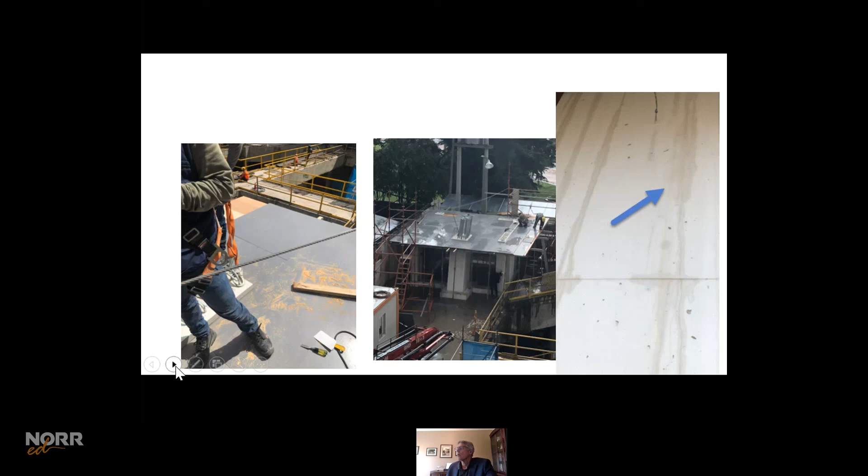So we used a sealant - I think I've got it in the next picture. Here it is. Yeah, an acrylic latex that if we set it low, about an 1/8 inch below the top surface of the panel, and use this latex silicone caulk, you're able to wash it and clean it off with water and a rag, and it doesn't leave a smear or a blend of material onto the surface, which again can affect the architectural look.

The other thing that I talked about was needing to deal with the surface imperfections and the air pockets that would naturally congregate, especially in the slanted columns. So we engaged Wacker Neuson, who's a supplier of external form vibrators, to come up with a system and a methodology to which we can utilize this on our construction process.

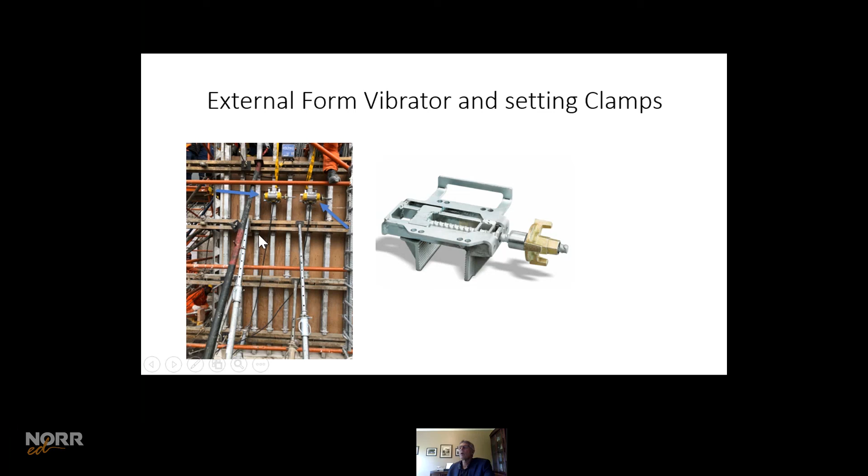So we went with these. This is a clamp that the external vibrator is bolted into, and what you will do is set this onto the vertical beams of the formwork and impart the vibratory loads.

There was a method on how essentially every 50 centimeters we would move. We would use 2 sets of external vibrators, and we would leapfrog, so that every 50 centimeters we had a series of vibratory screeds or external vibrators that would impart a load into the surface of the concrete, spaced appropriately through the beams, and remediate the potential for bug holes.

The optimum vibration was 6,000 RPMs, and we did a series of tests to determine the optimum duration for impacting this load. So we went with a 30, a 50, and a 60-second duration to measure the effects and see what worked out best. We were worried that if you do too much, you may segregate the SCC and create problems that way. But ultimately the 60-second duration was our optimum, and that's what we went with.

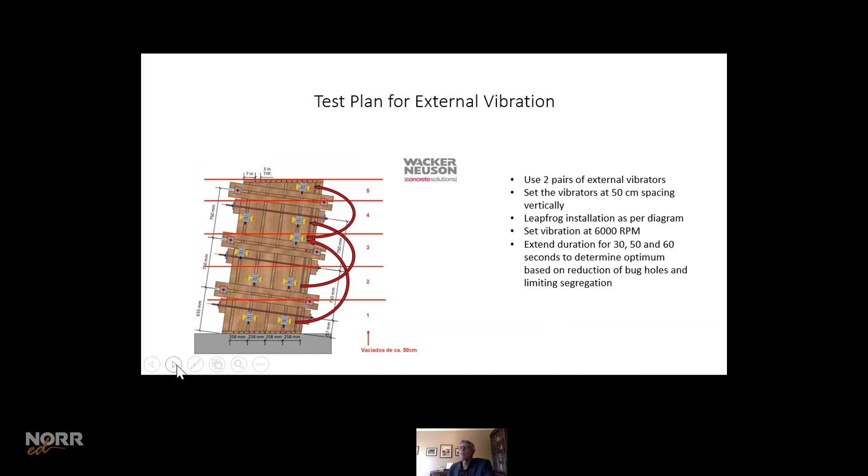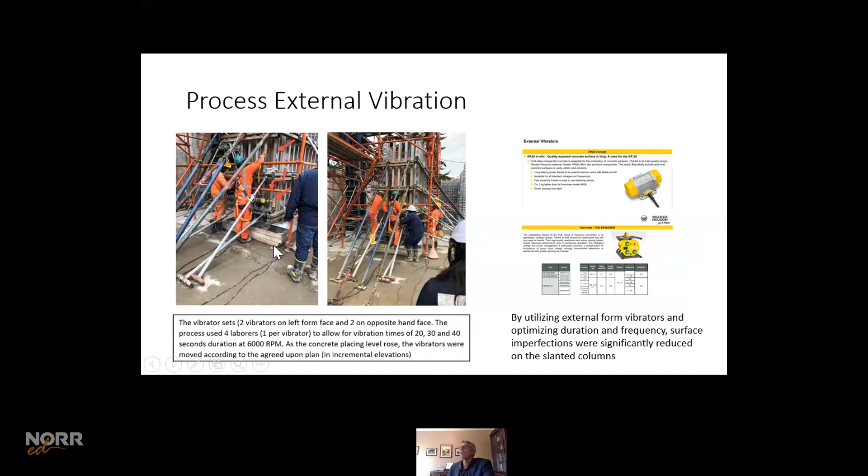And this was just them going through the motions with the - basically you have a rheostat and a frequency adjuster that eventually feeds into the external vibrator, which will then control the RPMs. And with this, we would turn it on and turn it off for the duration that we were looking to achieve.

Placing these walls was a challenge too, because we were using SCC, but we wanted to ensure we got the minimum amount of imperfection in the surface. So we used a Tremie process to place the concrete, and we would place it at regular intervals of approximately 3 meters on center, starting from one end and moving to the other when pouring our walls.

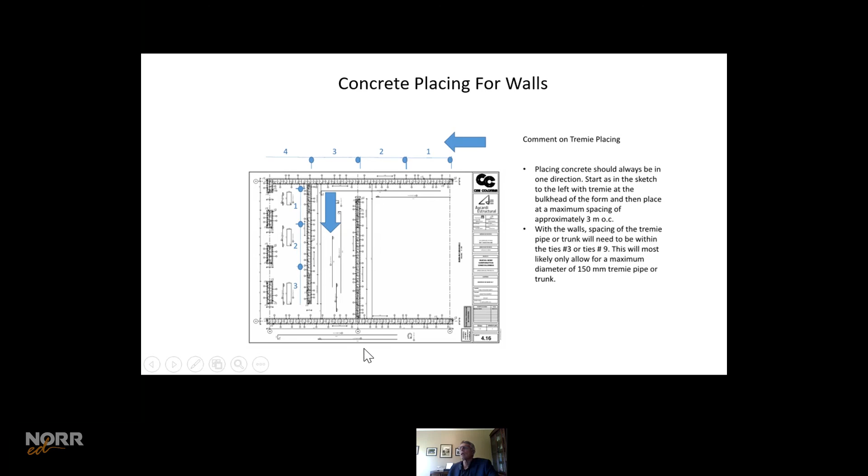We used a 150 diameter Tremie pipe, which required us to work with the engineer to ensure we had spacing between the thinnest walls so we could place it. He was able to move his steel and make it work, so we had ports every so often that we could place our concrete through using the Tremie system.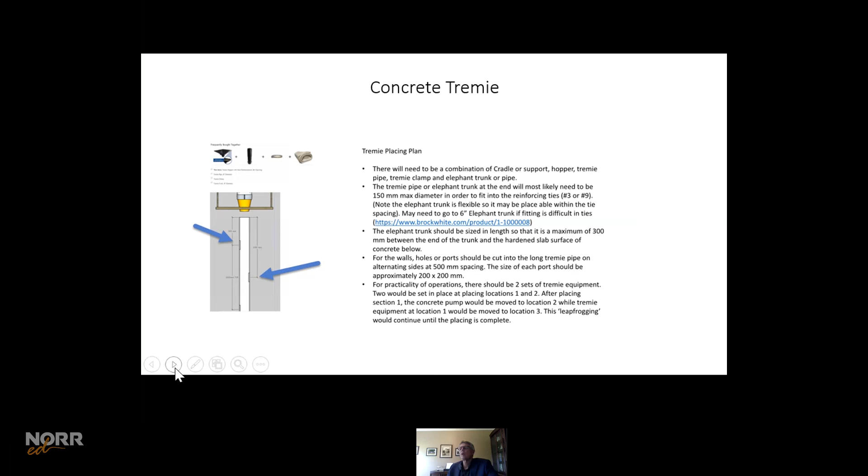Here we are starting our pouring, and as you can see, the concrete is definitely white. We used a pump into a spider crane and into the hopper to place it.

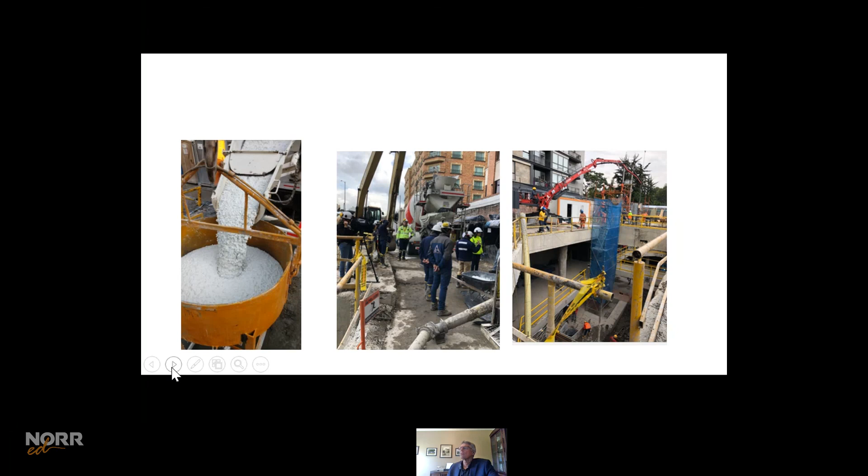This is a picture of the placed concrete. Around the perimeter here is our drainage channel. We did a mock-up of the drainage channel to drain away to the core, with supports or brackets to hold the channel while placing concrete. This plywood is a cover over the drainage channel so we didn't get concrete into it. The brackets had to prevent uplift from the channel as it rose and displaced from the movement. It was SCC, so it placed well, and you can see how it worked.

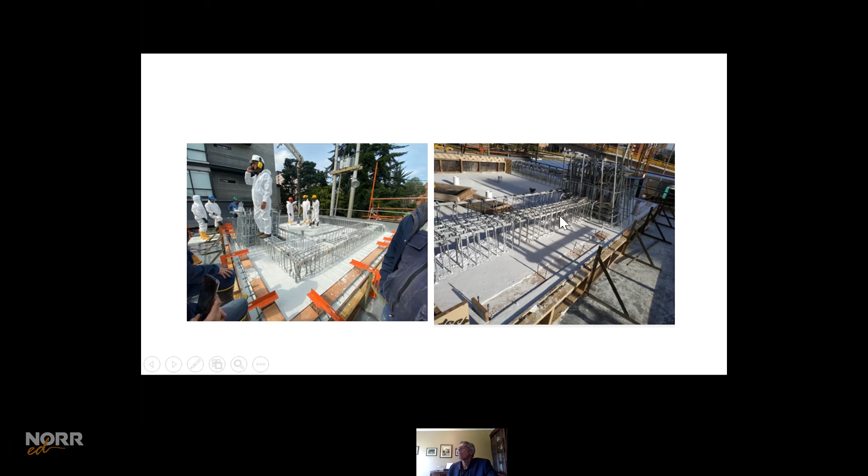We did get some discoloration in some areas, like the picture I showed where rainwater carried sawdust in. Also, we found that when sealant in the joints was flush with the level of the formwork, contaminants from the air would be attracted to the sealant and we got a black line. So we realized we had to clean it to match the mock-up, and in future placements we had to move the sealant bead back at least 1/16 to an eighth of an inch below the level of the formwork surface.

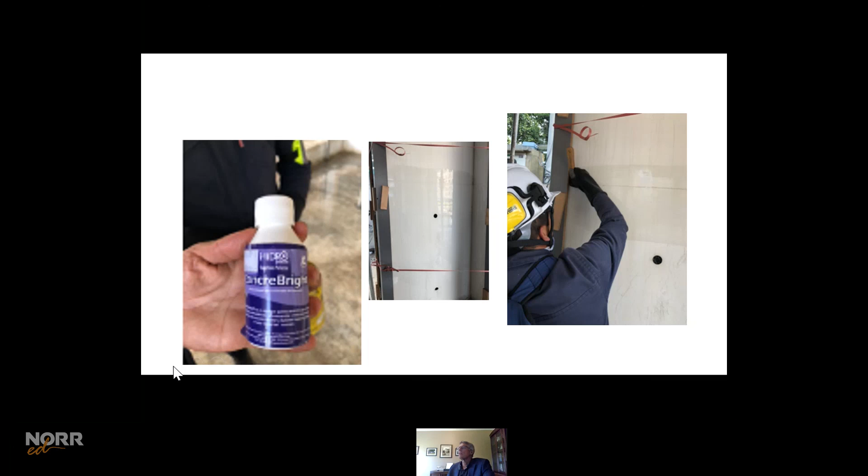So we used a product that worked very well. We tried a number of different products, ConcreteBright, which you can cut back 2-to-1 or 3-to-1 depending on the type of contaminant. We had a very efficient person who was able to do the cleaning and patching for us, which gave us a very beautiful looking element.

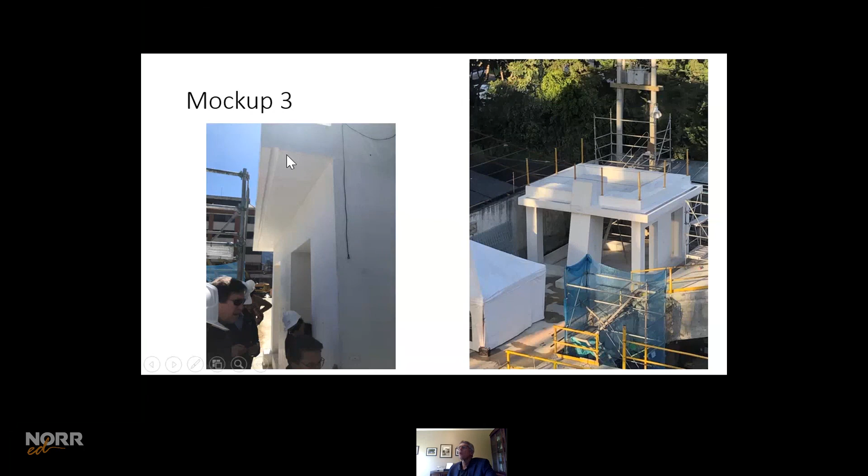Here we are with our mock-up placed, reviewed by all the parties from the owners, the architect, and Rodrigo the project manager. You can see how the white color stands out in the building, with sharp corners and abrupt finishes. It gave us an element that the architect Thomas thought worked well, and it really does stand out as an iconic type element.

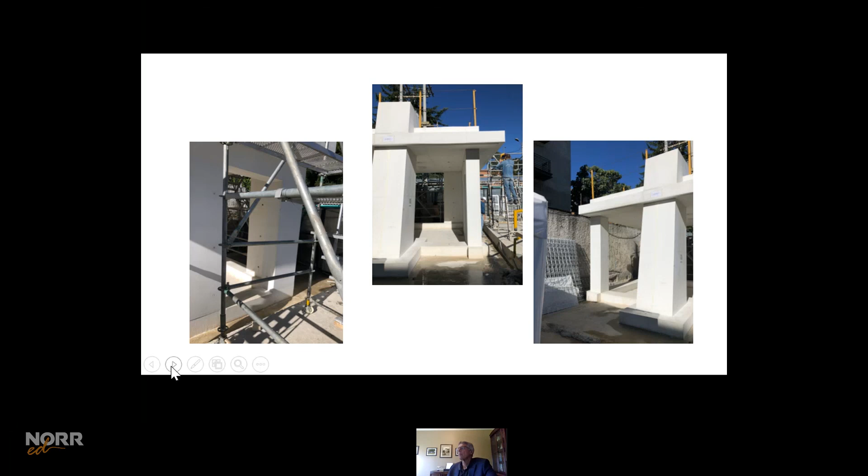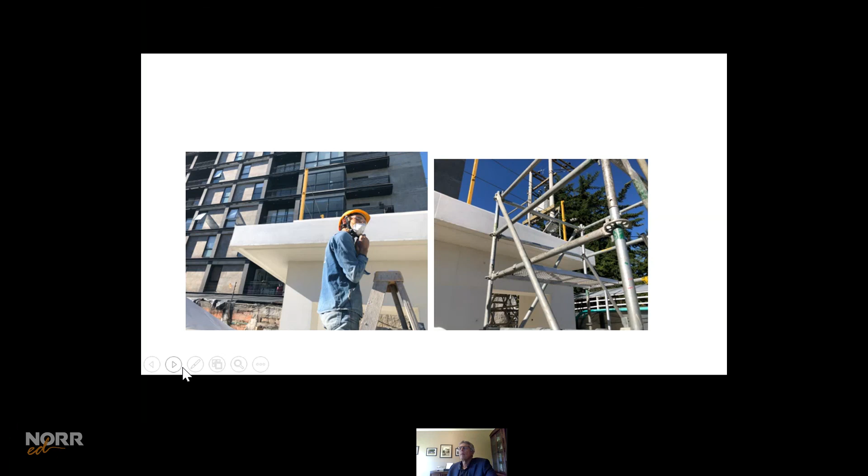There's the perimeter eyebrow beam from the bottom, and looking at the drainage channel we had, we pulled off the covers and everything. It was a stainless steel cover, and you can see how it blends and melds with the building.

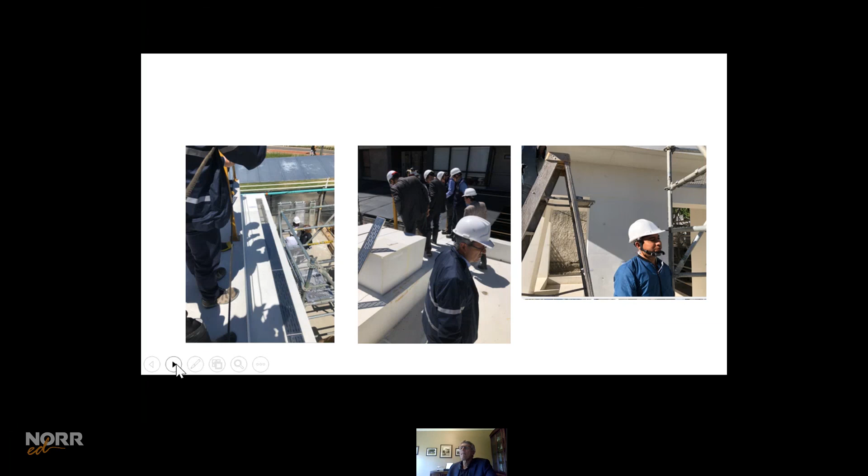So what they're doing is standing at the curb area where essentially the glazing would be set, pretending you're looking as if from the window looking down, to get that visual impression. Again, the stark corners and edges and the coloration of the sealing. Some of the black was from sealant that was too proud, but we were able to clean this off to give a very good impression.

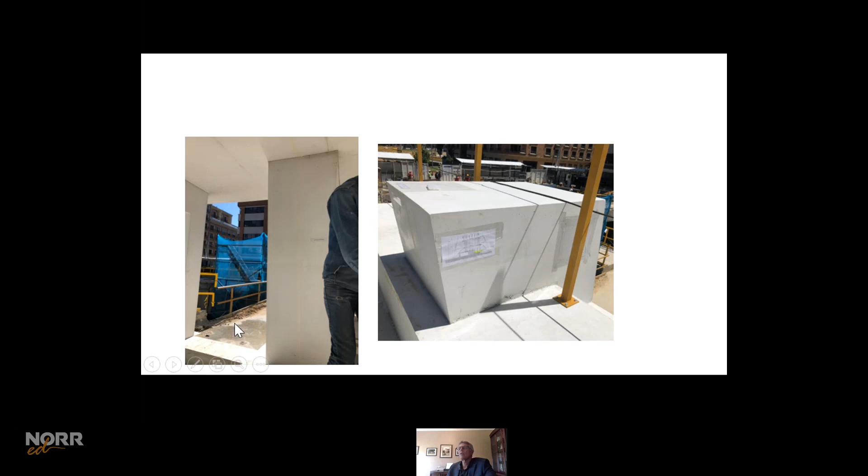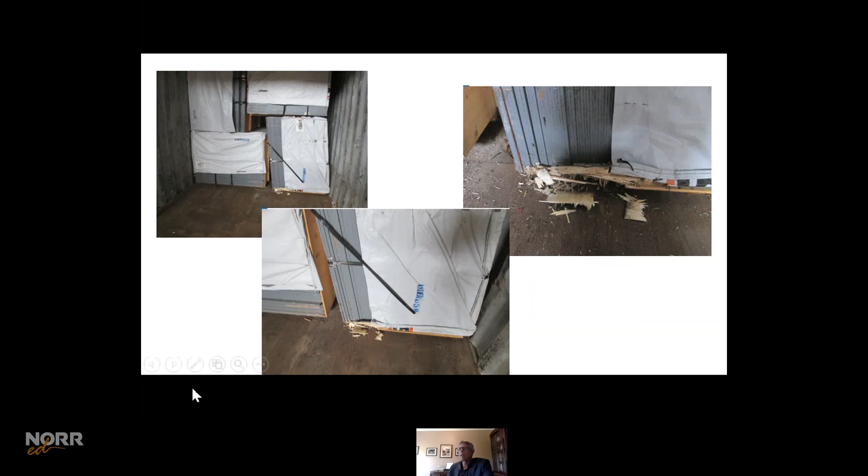Just quickly, we had to deal with the manufacturer of the plywood, because the first shipment we got was damaged like this. The edges of the plywood had the paint rubbed off, and there were areas damaged due to forklift handling of the pallets out of the container.

So we modified the protection and handling mechanisms with Savannah. Here you can see what they're doing is setting the panels into place and aligning them. Then they place a press to push down the panels, and then they spray paint all the edges. That's the process for doing that.

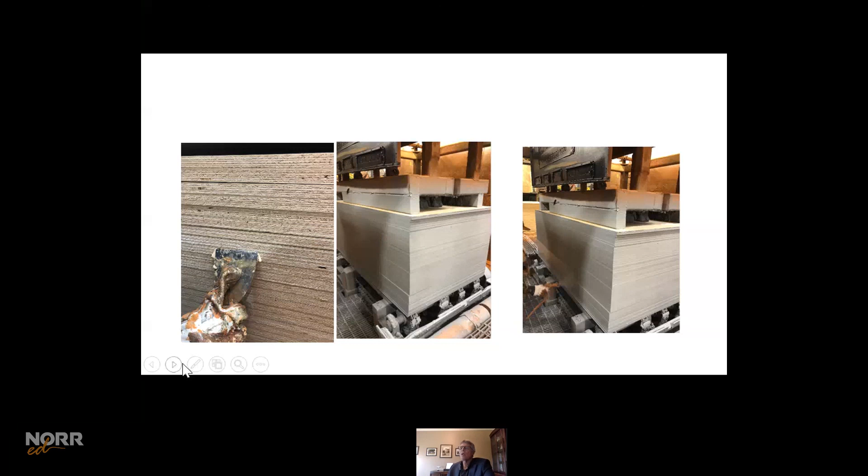Because of our concerns with the quality of the edges, they changed the paint to a higher build solids material that worked out a lot better and addressed a lot more of the concerns. They also had special care and attention to the milling process when they cut the plywood, so in fact they would get the best surface they could.

Then for shipping, we have to protect it. So what they did is put plywood samples on the edge, the top, the ends, and the underside, so in fact it would prevent any damage to the edges from shipping and handling. And Silvio, that is it.

Any questions? Gosh, that was fantastic. That was a great presentation, Lloyd.

Maybe I can start off. Lloyd, you went through quite an elaborate process of shortlisting almost everybody on this project. How was that? I mean, it was construction management, but how was that process managed? Because generally we're used to shortlisting one or two subcontractors, but you were actually shortlisting the ready mix guys, the plywood. How was that managed, and were people actually paid for the mock-ups and going through the different phases?

They were, once we got to mock-up 2, for supply of the concrete, yes. The shop drawings for the formwork guys, they supplied, it was part of the pre-qualification stuff that we had to do. For the formwork, we got samples, Silvio, just for the first bit, so it wasn't a big deal to do that. So we did that part.